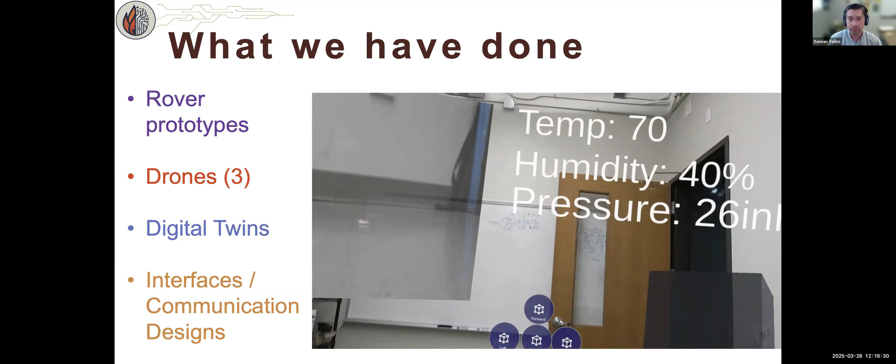Part of what we've considered, and what you're seeing in the video, is an augmented reality real-time monitoring system. If you were to have a rover going into a burning building, can we see the live camera feed of that rover at the same time and understand the temperature and environmental factors once the rover is inside?

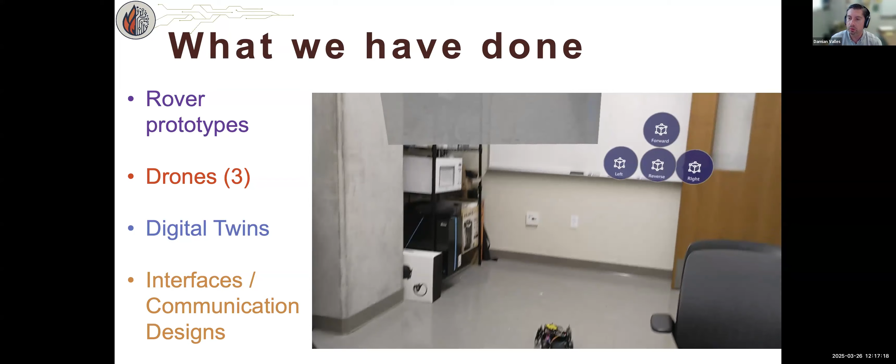We're showing somebody wearing a HoloLens from Microsoft, and you can see in real time my other students walking around the lab. You can see in real time what's going on and understand the environment and situation. You can see what the rover sees for navigation, and we can interface all these pieces of technology, so instead of dealing with that yourself, you can see this before you get to the site.

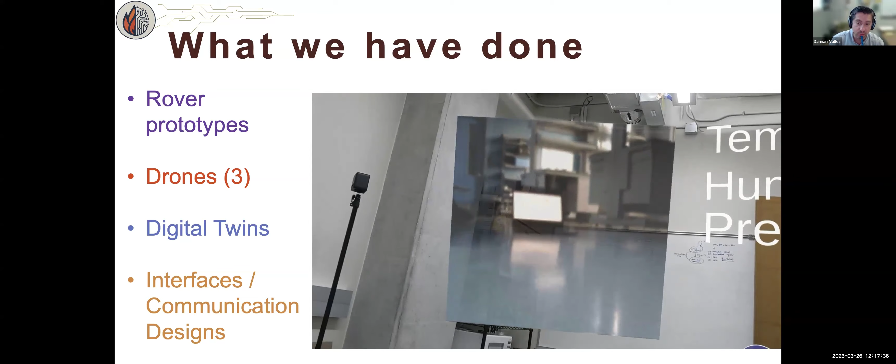Ideally, this gives you insight right away to plan exactly what you need to do by the time you get there. Having that information in real time, even managing the rover in real time, helps quite a bit. So we started from a very unusual point of view: we wanted to see if artificial intelligence could help us go through different things.

The reason we started there is because the problem is difficult in the data. That doesn't mean we couldn't start with the robotics - it just means the data itself is so scarce that we needed to understand if this was even doable, even to integrate something like artificial intelligence. Detecting people inside a burning building is an issue.

Even listening to people inside is hard when everyone's screaming, there's a lot of people talking, fire makes noise, windows break, and other things burning create more noise. So can we locate people in a burning building? Can we transmit that data? Can we develop the communication that transmits it? We started from the inside out - we wanted to see if the AI was actually doable.

What we proposed to Dell Technologies about 4 years ago was to figure out the AI where we could put a rover together with sensors to determine if people can be seen through infrared cameras. Can we actually locate and triangulate people screaming around the building, listen for that cry for help, and pinpoint their location? We wanted the AI to change the navigation of the rover to go find the person who was either visually detected or triangulated within the structure.

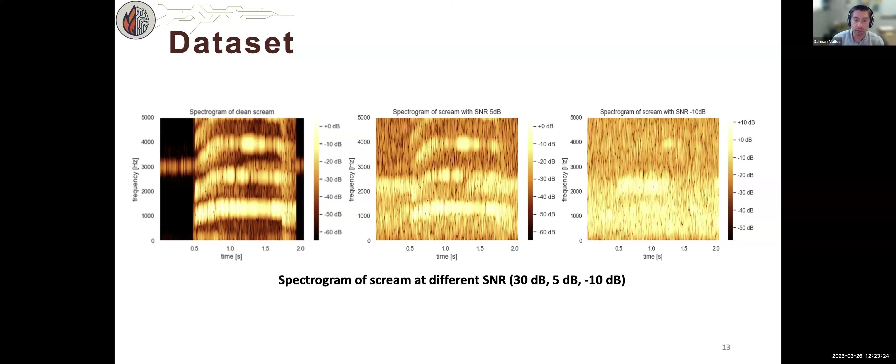So the computer's job is to still recognize the scream. We wanted to figure out if AI can actually figure this out for us, because we ourselves have our own limitations in those emergencies.

So we ended up using a lot of techniques that are kind of old. Some people think of Alexa and Siri—everything they do to process what you're saying is technology done way before I was even born. People don't know this, but I dusted off some textbooks from the 1960s to do this project, and it still works. It turns out people back then understood the frequency of voices and screaming very well.

That's very critical because even though computers could be smart, they're really not—we have to create enough examples for a computer to learn what a scream looks like. So we deduced all this data to make sure it can spot humans in really difficult environments: the heat map and how they look in infrared, and how they actually sound when there are environmental factors like noise, broken windows, and the actual noise of fire, which reduces the scream or cry for help.

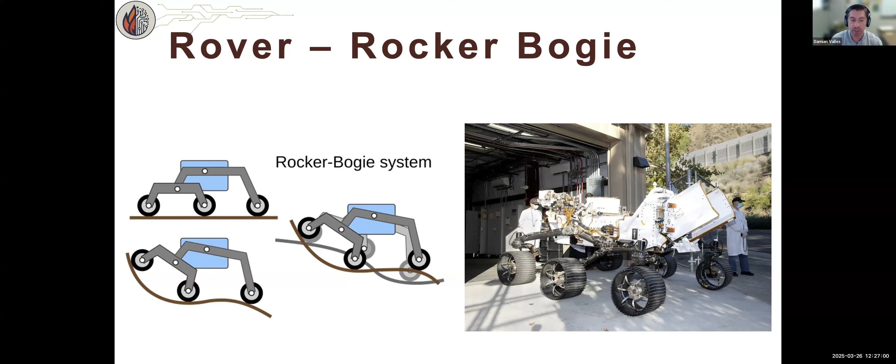For the last 3.5 years, we've evolved in a way that we wanted to first put boots on the ground, and we wanted to make sure we had a rover that mimics what's on Mars right now, mainly because NASA has shown these things actually work in very difficult terrains, in extreme temperatures, and without knowing the entire landscape. It becomes a way to mechanically move around things that could be on the floor, whether in a residential structure, industrial structure, or anything that can impede someone's navigation through the structure. A rocker-bogie system has shown that it can overcome a lot of things.

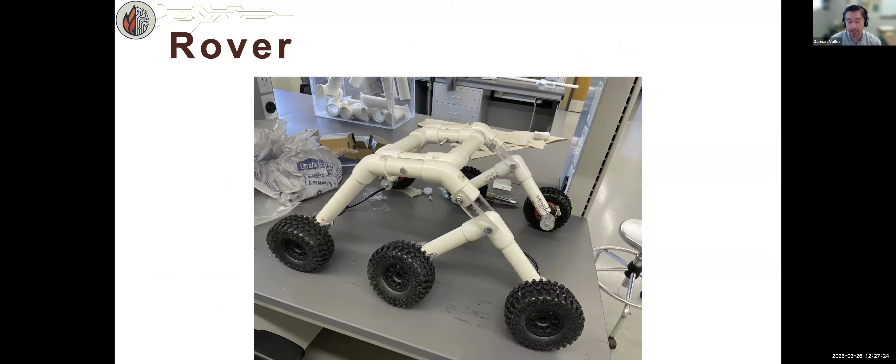So we started small. You can see the Lowe's bag - this is how low budget we went - but we started mimicking the mechanical chassis of what this would look like. This is not what we currently have, but this is how we prototyped the concept and started testing all the mechanical and electrical computation components that need to go into building something like this.

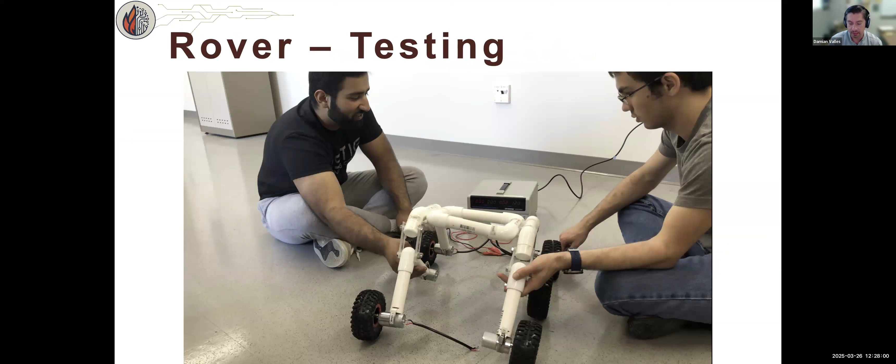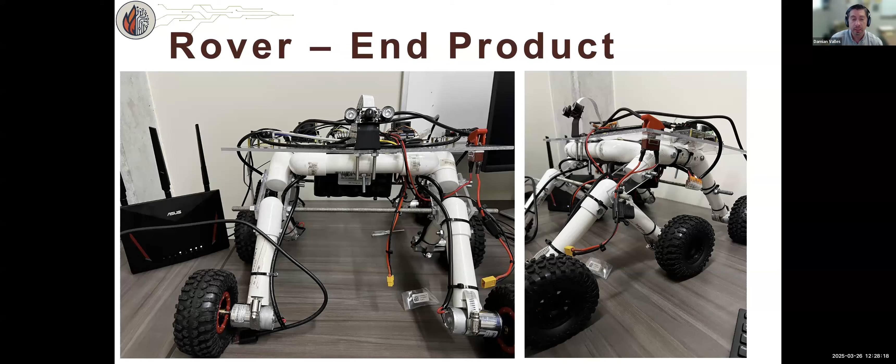You can see some of the final products of this concept and how we were dealing with the wiring, the cameras, the infrared, and some of the computers on top. Here's a top view - we have 3 different computers on top that deal with navigation, the screaming, the human detection, and the communication.

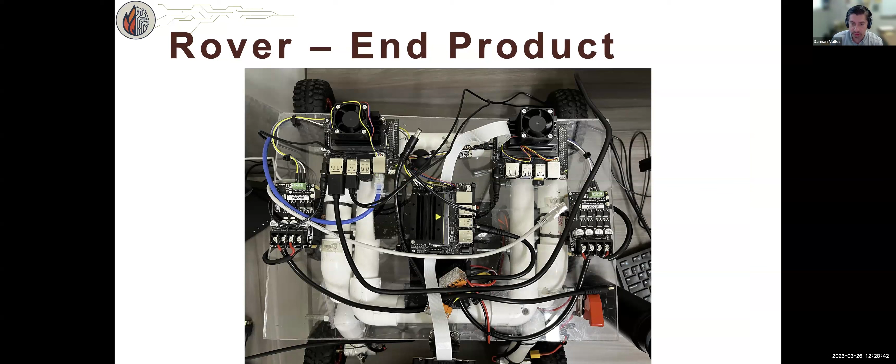We need to send this to humans to make decisions, so we needed all these small computers to make this work. And then you can see some internet cables in there - that was for us to communicate between computers to make the communication much quicker.

You can see a small video of how we were - I'm sure NASA was doing this before deploying to Mars - but we put something that would mimic furniture. Even though you can't see through the smoke, maybe you can still navigate through a box, and make sure this thing actually moves and survives. It doesn't have the tilting there to make a good left turn, but again, it was our initial approach to making this thing move.

It doesn't move really fast, but ideally what you want to see is something that goes much quicker than this, probably at a much faster pace, or a human walking pace, where it can go and capture data much quicker than what it's moving there.

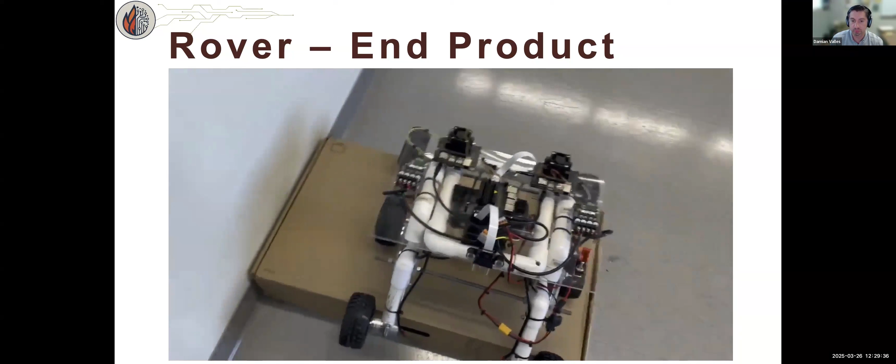So autonomous driving is probably the thing we wanted to change, because like any Tesla car or autonomous driving features, they have LiDAR going so they can see and make decisions in the way it's interfaced with the data. Things we've done with running computations faster than this, and took away the remote system to make it more autonomous so we can avoid walls, go around people, and do things like that.

So basically what we did is add some of these LiDAR capabilities to that rover, to make sure we can see what the rover is actually navigating through. Again, this is the favorable part of the environment where it helps you see through the smoke and be able to navigate through any obstacles, walls, doorways, and people. You should be able to detect people from there.

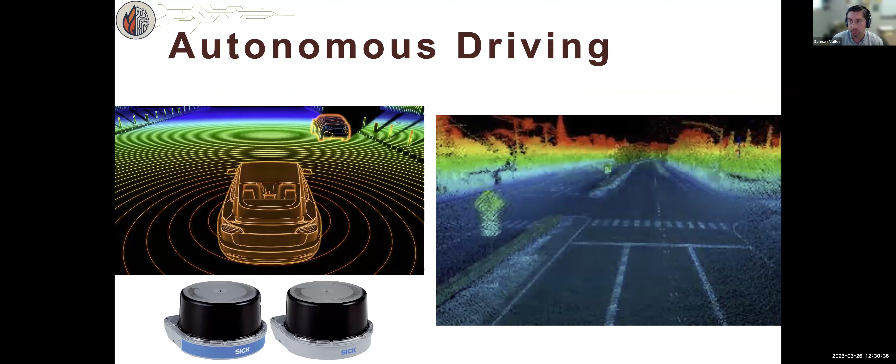So you can see from 2020, we went to something very tiny to 2022, which is the video you guys got to see. Then two years ago, a year and a half ago, we started making the rover much taller, far more bulky, and with more computational resources, because we were doing more microphones and triangulating. We kept adding more things that we were trying to integrate with software and making sure this was actually possible. Again, we haven't field tested this. We're just trying to figure out if the technology and design process can actually be implemented, because it's a tall task for the considerations of all the necessary data that would be useful in that kind of emergency. It's been evolving for 5 years now, going into our 5th year trying to make this rover work with more technology going in there.

Now the problem with this, and it's obvious to anyone who's probably been in high temperatures, is that these computers, this type of material will not withstand that kind of environment. Computers have a very low threshold of being able to turn on anything above 90 degrees Fahrenheit. Computers shut down and stop working very well. That's why they have a lot of fans, or they live in data centers, because they're very sensitive to temperature, and we have to thermodynamically understand how we're going to keep these things cool if we were to deploy something into a burning structure.

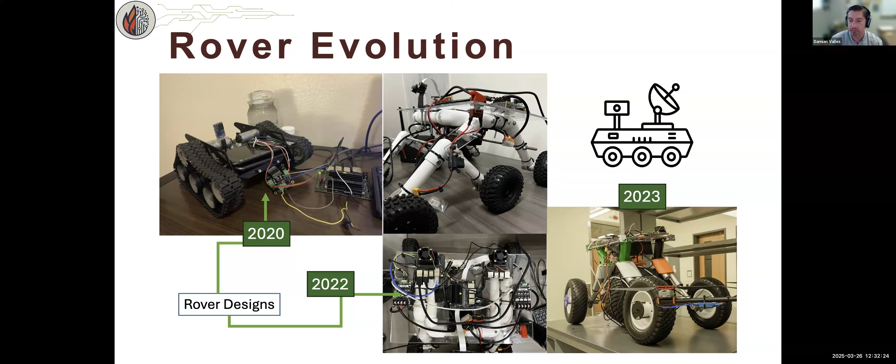So what the rover can do right now is basically capture a lot of the environmental data of where it is, be able to detect people in front and around the rover, triangulate and understand the screaming. We do have infrared and thermal vision mounted into it, and then LiDAR to understand the navigation better and be able to make decisions while it's moving around.

The other thing is we can actually send this data to somebody who can just see what the rover is seeing and capturing. We have an interface where we can see the data live on a computer screen, and then be able to understand what's going on within the structure, either via radio, which is how a lot of the environmental data is transmitted, or via Wi-Fi, where you need more of a streaming capability to make the video or images actually come in real time, because radio doesn't support, or it takes a long time to send video and pictures through that communication medium.

So we have to be conscious of what kind of communication we're going to move forward with, because it may not be either of those two. I think probably some kind of cell phone technology based, where data, video and images can be transmitted through the same medium, and then making sure that everything's secured when you do that.

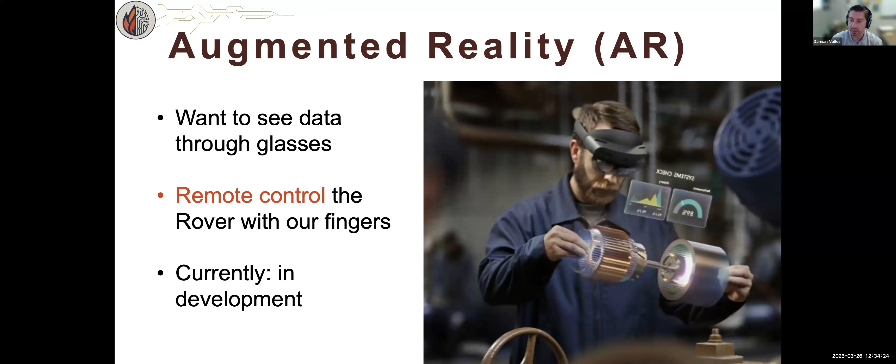Let me quickly speak about other efforts. So you already saw the student looking at the screen with his hands, moving the rover with his hands, and seeing the real time of what a digital twin looks like. So we created a digital twin of the rover in order to control remote this a little bit better. And you can see the design process of my student, as he was trying to create a digital twin of what the rover looks like in the virtual world.

So even if you cannot be on site, the goal of a digital twin is that you can actually monitor the rover even from the station. So if you can do that, even though it's on a call and you're in the station, you can still see what the rover's doing and what the rover is actually capturing. So the goal of a digital twin is to have a digital representation, as much as you can, in real time, to understand the situation in some remote place.

So utility companies use this to monitor their lines. Many oil and gas companies do this to monitor their own sites. So they do digital twin monitoring to make this thing work. And besides generating and developing the graphics for this, you do have to have a way of communicating the thing you're watching, the digital representation, to the actual physical thing. And we have to make sure that people who are looking at the digital twin are actually looking at the real data that's being captured by the actual physical rover.

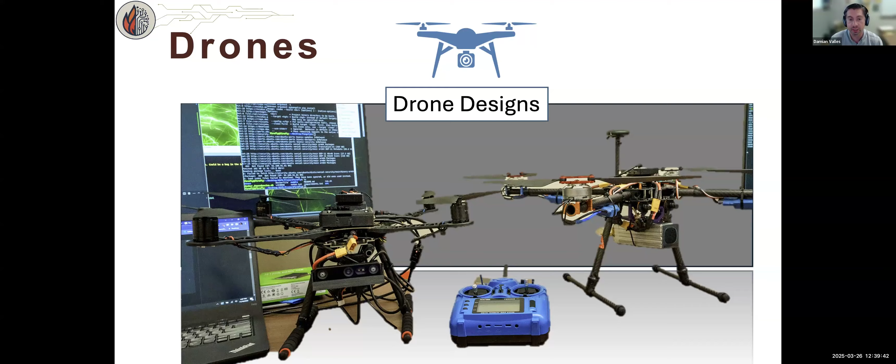And so what we're trying to figure out is how to make this work. But the problem with the rover and the drones is that the material of propellers and the chassis of these drones are not withstanding high temperatures when it comes to structures, not necessarily in open air.

And just kind of quickly do this over and over again and let the AI understand the coordination and orchestration it needs to do in order to make sure to go into this space and clear it, right? If it's not cleared, then mark it as somebody inside, and then let the people who need to know that, and transmit that information.